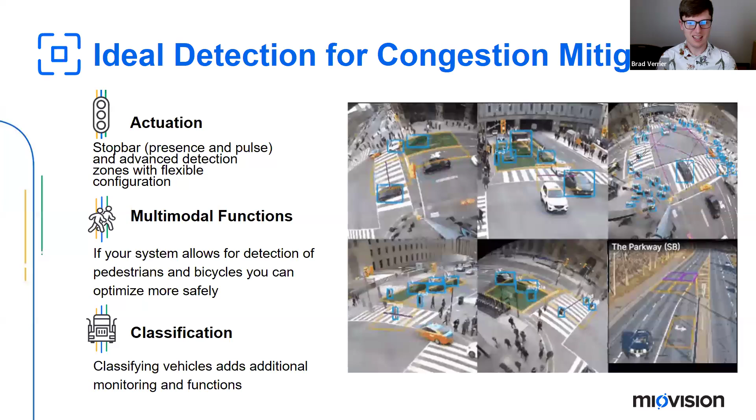On our next slide, we're going to be talking about priority control. Priority control is a bit of a blanket term, used for what's often called EVP and TSP, which is emergency vehicle preemption and fleet and transit signal priority.

There are a couple different types of priority calls that are very dependent on who's using it. For example, if a public safety professional is using the intersection, say an ambulance, we want to give it a green phase as quickly as is safe. That's with regard to if there's a pedestrian currently in the crosswalk, making sure we have our pedestrian clearance and vehicle clearance times set up correctly. We're preempting in advance so that as soon as they get to the intersection, they can get through as soon as they can.

Conversely, when we're working with things like transit, fleet, snowplows, and other systems, it's a little less important that they get the green light right away. It's more about leveraging them alongside detection so that vehicles with more importance, whether that's freight that needs to be on time or transit making sure bus routes run smoothly, can be tracked to figure out if a priority call should be made to either extend the green phase to allow them time to clear, or end the previous phase early so they can get a green light as soon as possible within the context of overall traffic operation.

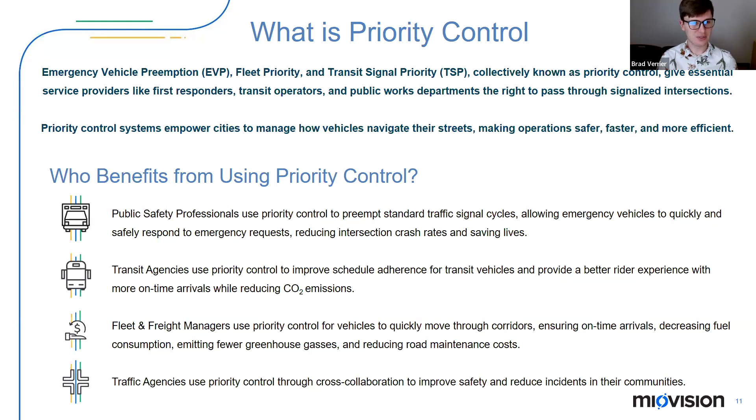The first is IR. Opticom was, we believe, the earliest in the space when it comes to preemption, and for almost 50 years IR was the only way to go. We did that through IR emitters on the vehicles, connected into the I/O wiring harness, making a customized flashing signal which would be collected by IR detectors at the intersection facing each approach using priority control. We communicate that down into the controller through a dedicated piece of hardware.

We then moved on to radio, where we took essentially a very similar solution from the vehicle side, except instead of using an IR emitter, we're now using radio, much less line-of-sight based, and we only need one detector on the intersection side, so it's a lot easier to maintain. Very similar on the intersection side in how that radio communicates into the traffic controller. This did solve a lot of the issues with IR, but there was still a lot of room for growth.

Most preemption systems today leverage a cloud model. The cloud model generally either uses direct CAD AVL data, or we can leverage GTFS or different freight data feeds, as well as modems in the vehicles which are transmitting the current status of the vehicle as well as its exact location. Then from the intersection side, you can either leverage hardware to communicate to the controller, or many systems, including Miovision's and others, are able to leverage a direct connection to the controller without any need for intersection components.

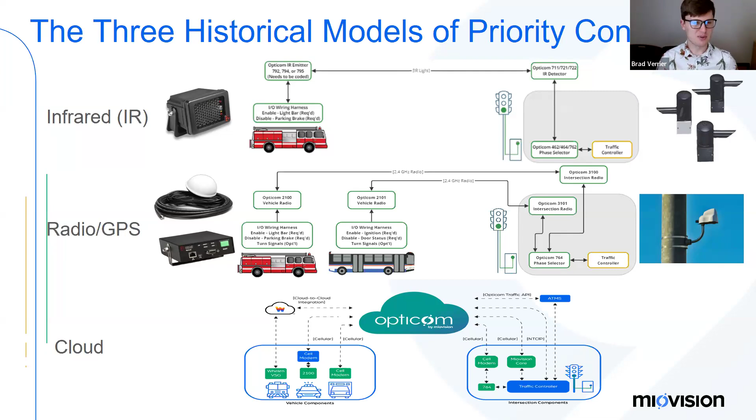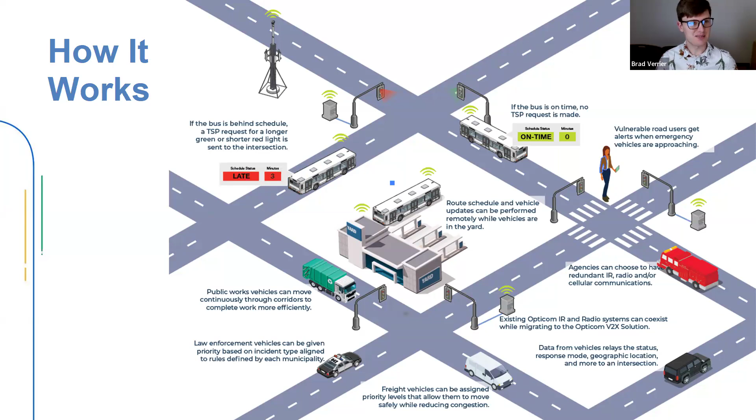Next, I want to talk briefly about adaptive control. It's not the topic of today's discussion, but I wanted to give you a quick understanding of how adaptive control also allows you to account for the vehicles using your road. Adaptive systems function based on understanding the current input at the intersection and then accounting for what operations need to be made to expedite those vehicles. In Miovision's case, we're leveraging the same hardware that the preemption and detection systems use, but there are lots of different ways to do adaptive control, whether through a hardware implementation or directly through a controller.

These allow you to accommodate not just public service vehicles, but standard cars as well. One of the big advantages of adaptive control, if set up correctly, is that you can leverage things like transit signal priority inside the context of adaptive control, so we're accounting for transit not in a vacuum of 'there's a bus coming, it needs a green light.' But if I notice there are 30 vehicles trying to head east and one bus trying to head north, I'm going to give priority to those 30 vehicles, because it allows us to weigh those buses inside the context of overall traffic.

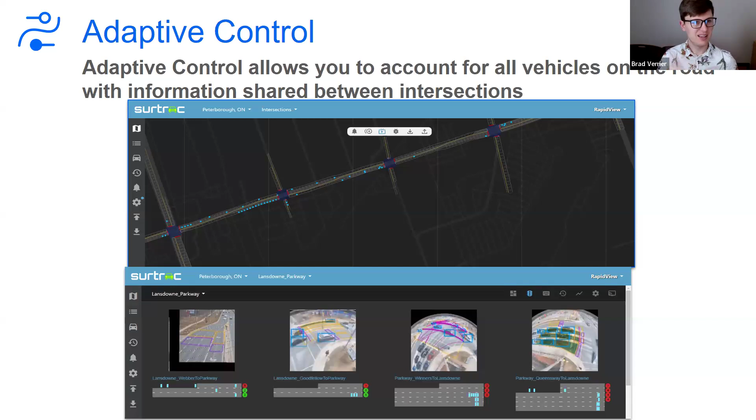Now we're going to move on to the second half of the presentation, around tracking continuous movement. I wanted to cover a couple of different things around how the intersection is operating, and the effects that everything we went over in the previous section has had on how the system is operating. We're going to be covering signal uptime, intersection utilization, reducing collisions, transit and freight effectiveness and consequence, ATSPMs, and the value before and after analysis.

Starting off with signal uptime, this is really about tracking anything that could be going wrong across your network. Whether that's an intersection in flash, a lack of detection information coming up, power outages, detection failures, or any issues with cabinet-level technologies, you're able to monitor those and get alerts for anything that's going wrong.

Then you're able to get certain notifications and alerts for all of the problems I've gone over. You can either review all of those alerts inside the platform, or you're able to get notifications. It's very important that if your intersection is in flash, you've lost power, or there's some other major issue, there's some way for you to be aware of it so you can jump on those problems and solve them as quickly as you can. Because when it comes to a dramatic failure at an intersection, that's the highest impact on congestion, so you want to get out there as quickly as you can.

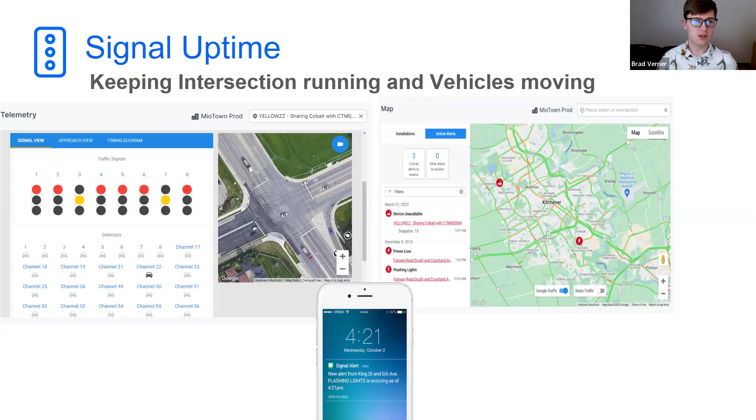A lot of companies, including Miovision, also offer temporary studies where you can track count data at an intersection over the course of about two weeks. But using a permanent solution is an easier way to make sure you're consistently tracking the utilization of your intersection. That's going to come more into play once we talk about before and after, closer to the end of the presentation.

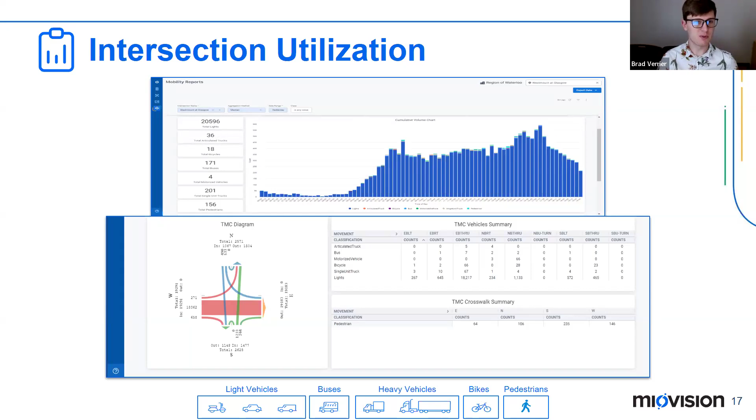Reducing collisions is a great way to minimize congestion at an intersection. Crashes can be a major source of congestion, so making sure to reduce those collisions before they occur is a really great way to avoid those pitfalls.

By tracking near misses, the number of times two objects almost collided, and tracking the severity of those near misses so you understand how close that was to being a fatal accident, you can take preemptive measures to improve safety before collisions occur. Since you can collect that data on a regular basis, it's a lot more reliable than crash data, which often misses details and is spread out. Using a system that tracks near misses gives you a full picture of what's happening at your intersection so you can make direct interventions to reduce this potential barrier.

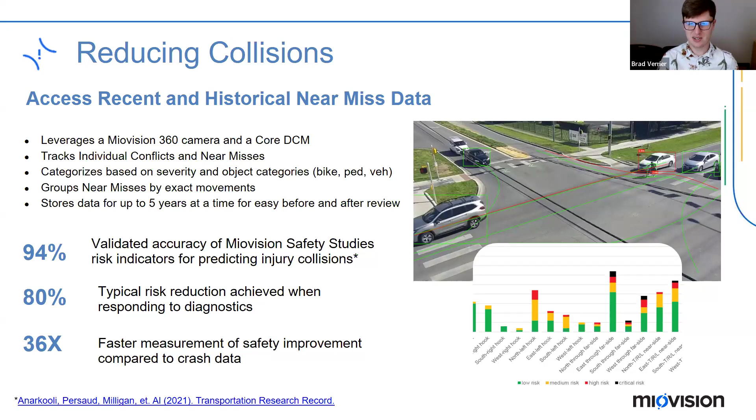Next we have conflict clips. This is a demonstration of how Miovision's near miss detection works. You can see it's tracking the two objects that almost collided, their relative proximity, and the relative speed of the inciting vehicle to give you an idea of how close that was to an accident. I find the one on the right very revealing because it shows one vehicle was completely unable to see that pedestrian until they almost hit them. So perhaps this is a case where we need a dedicated left turn if this intersection is busy, to make sure that's a protected movement and reduce the number of collisions with pedestrians.

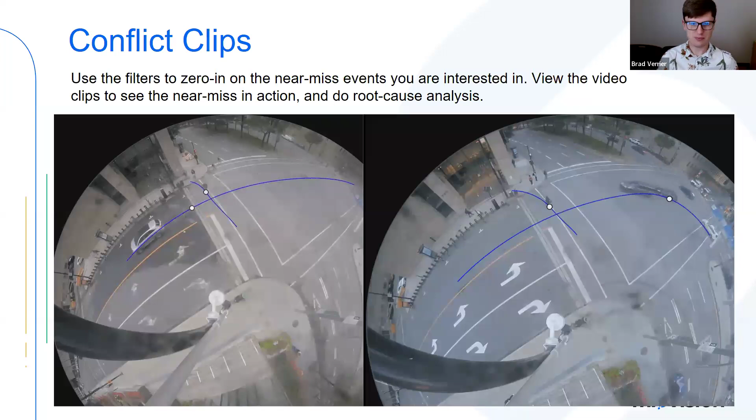We're also able to measure the effectiveness of some of the other systems we went over. In the case of transit and freight effectiveness, it's a bit more direct. We can tell you things like how long the vehicle was stopped along the route, how long it takes between stops, total travel time, and time spent stopped at signalized intersections. This is a great way from the transit and freight side to understand how congested that route is. You can talk to traffic engineers about improving the operation of the intersection as a whole, or investigate giving more allowance to your TSP green times.

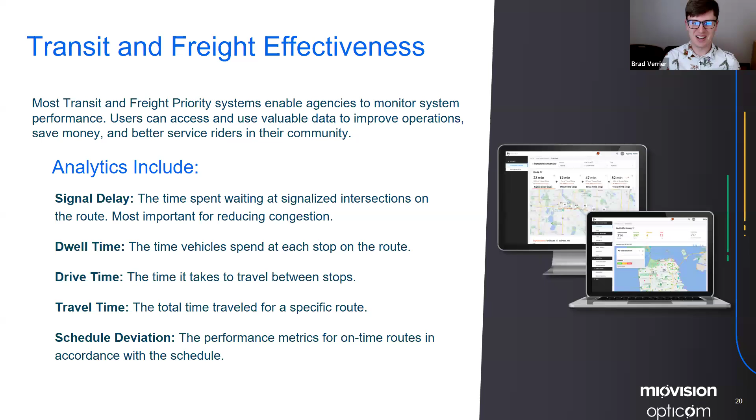We carry on, we're just about done here. Next slide, here we go.

The last thing I wanted to talk about are ATSPMs, using data over time to measure the impact of these systems. You can use simple data points or data over time to understand not just how your intersection is doing, but how changes you're making, whether implementing freight control, TSP, or some other system, have impacted the intersection as a whole. We want to make sure we're reducing congestion overall, not just for certain individuals. Leveraging ATSPMs to understand the impact on overall traffic is a really important part of that discussion.

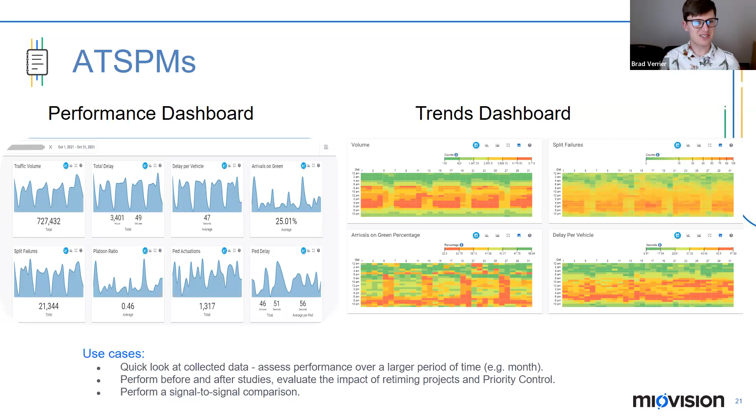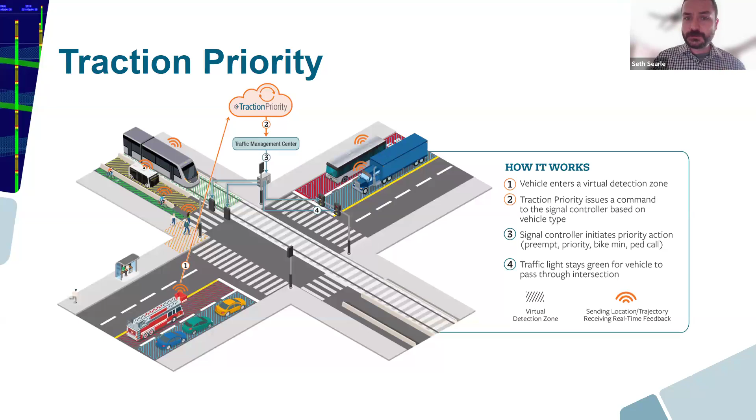That's ingredient one. Ingredient two is the connection to the traffic signal controller. As long as there is some type of communication to the controller, we can typically use NTCIP messaging, but there are legacy controllers we support too that use old protocols like QuickCom and AB3418. As long as there's communication and a protocol the controller supports, and it supports some type of preempt or TSP remote commands, that's really all that's needed to make the system work. The graphic speaks to the rest.

Just some brief characteristics here - sorry if you're struggling there, Alric. I'm not sure if there's some advanced timers going on these slides, I see that happen sometimes. Yeah, I believe it is. If you need to take a minute to take those timers off, but I'll keep going. Let me know if you need me to pause - I've had that happen many times in my presentations.

Some quick characteristics about Traction Priority: it's fully cloud-based. The graphic you saw before - the quick way to summarize this is it's fully deployed in the cloud, with no equipment in the cabinet or in the field. The only consideration that needs to be made, true of any smart city or IoT solution, is you typically need some edge processing. While we can poll signals straight from the cloud, modern security standards and agency IT departments typically prefer that's done on the agency network. I bring that up as a disclaimer - while this is cloud hosted, practical considerations usually require us to do that polling and connection to the signal controllers on the agency network to comply with firewall rules. But all other processing is done in the cloud.

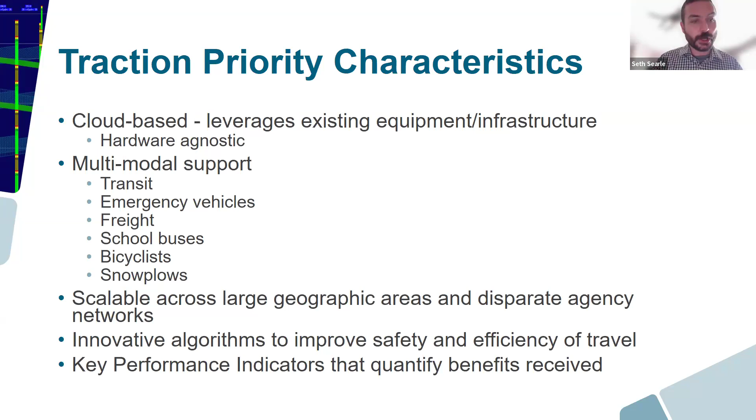Another characteristic is scalability - something great about cloud-based solutions. It can scale endlessly; we have the capability to continue leveraging more resources as you get 2,000 vehicles, 5,000, 10,000, and beyond. This also allows the connection of different agencies together. In one example, we've implemented freight priority in North Central Texas, providing priority to up to 10 different agencies in one solution - something historically difficult across disparate networks, but made a lot easier through these modern cloud platforms. I'm going to skim over the algorithms, but there are a lot of innovative algorithms used in the cloud to facilitate transit signal priority - business rules and adaptive control are some good examples.

And then finally, the key performance indicators.

Alric, let me pause here real quick - do you want to turn those timings off? I can show you where they are if you want to quickly turn those off so we're not constantly battling this. Please do - yeah, just hit escape real quick, and if you're in PowerPoint, there should be a timings view under the slideshow tab, I believe.

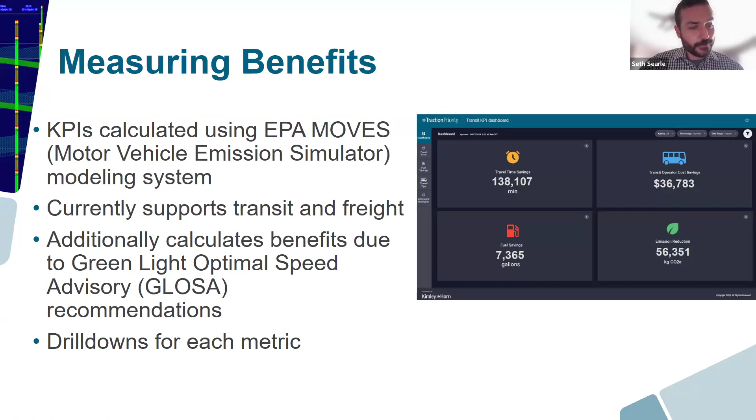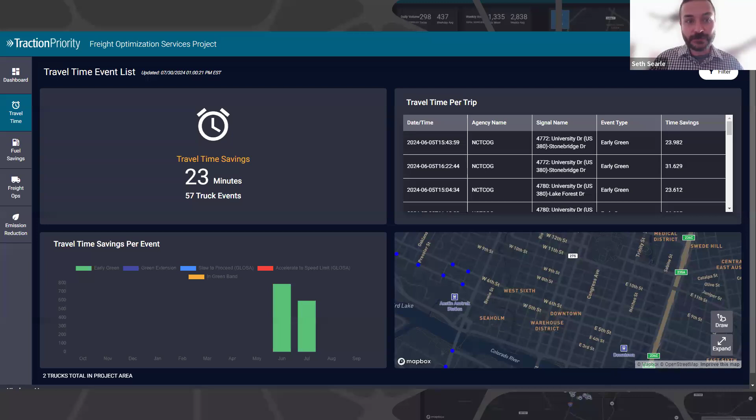And then if we advance, we'll go pretty quickly. These are some of the drill downs that are available for each of these metrics. So travel, it all goes down to how much time, thus fuel, thus emissions, thus cost, was saved by the system operating effectively. So this is the breakdown of the travel time savings - what did you save in terms of minutes?

Next slide, we have fuel savings. So this is based on all that information, those calculations, how much fuel was saved. And I'll just briefly mention, as you look at these different panes, you can fully drill down. This is broken down into every single TSP action - you see 0.083 fuel savings. You have full visibility, full drill down into all of this on a per vehicle level, per fleet level.

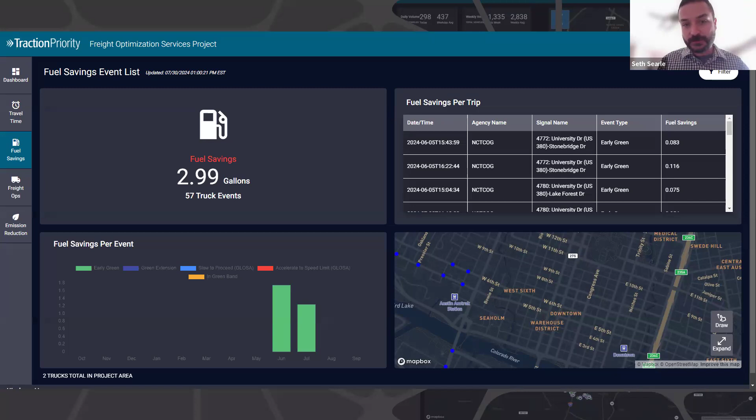With freight priority, there's a number of different fleets operating. So this will also support rolling that up, based on the filtering of the website, to see those benefits across the entire fleet.

Go ahead and go to the next slide. This is, again, just another view, the translation of fuel savings into cost savings.

This is something I think we anticipate getting a little more complex, so let me give one more quick example. We always focus on fuel savings, but something that was illuminated to me when we did emergency vehicle preemption is the wear and tear on brake pads, for instance, for a fire truck loaded with a full tank of water is massive. So when we're able to get them a green light and prevent them from stopping, it's not just fuel that's being saved, but also the wear and tear on brake pads and other components. The cost savings, while right now tied more directly to fuel, there's an unspoken benefit I haven't heard mentioned a lot, but it does seem to resonate with those who actually maintain these fleets - there's more than just fuel we can benefit from. That's something else we'll be aiming to capture.

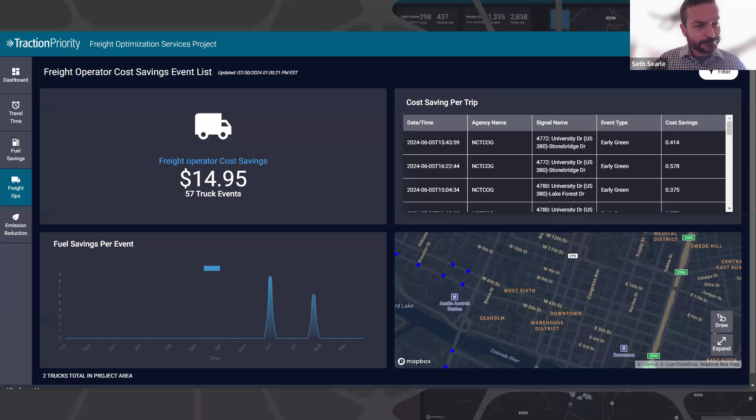Go ahead and go to the next slide. This is, again, just another visualization. This gets into the emission reduction - so of those fuel savings, the cost savings, what did that amount to in terms of emissions reduction?

All right, I think we have one more here. This is a separate display, hot off the presses - we're just wrapping up development on this now. In the vein of key performance indicators, and more specific to transit where there's a concept of a fixed route with predictable trips, we've developed a dedicated route status display that allows you, as the TSP system is running, to go back and view every single bus trip, where different actions occurred, where slowdowns occurred, whether there was a green success versus an arrival on green - there's a distinction. You can hit a green light not due to TSP, or get a green light due to TSP. So it provides that granular breakdown.

And then a number of tile cards on the right show the key performance indicators, or maybe we call these transit signal performance measures - that's what I've been hearing these referred to more frequently. Those are calculated on the right-hand side based on the different selections for the display. This is just another example of what we, and I'm sure many others in our space, are trying to do - take this awesome technology and show you here's everything it's doing, here are the benefits it's providing, because those are the big questions I think we all need answered.

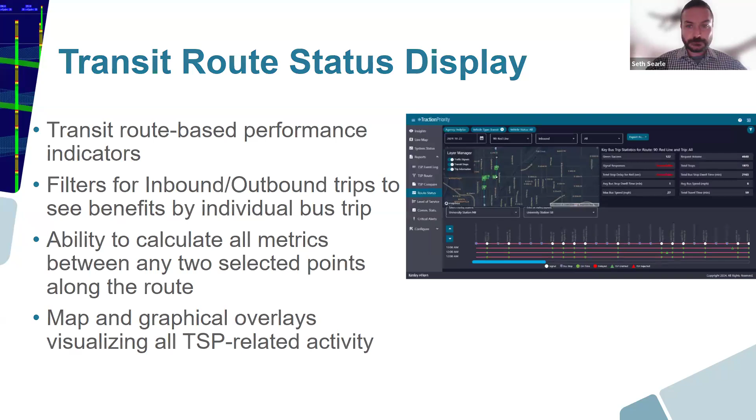And yeah, just a quick zoom in so you can see in a little more detail there. That's good - just wanted to flash that real quick so you could see the zoom in.

All right, I'm going to wrap up with these last couple of slides here. Just wanted to provide a couple of project examples. The intent with this section is what's happening out in the real world - what is actually possible beyond the standard stuff we all come to know and expect about TSP. So just a couple of case studies here.

Austin, Texas - this is one I wanted to focus on. In this deployment, we actually implemented traction priority citywide to provide both transit signal priority and emergency vehicle preemption in one solution. I want to give a shout out to Brad - I think he did a good job explaining earlier a lot of the behind the scenes, how this is possible and how a lot of this equipment can be used to do the same thing. He's spot on - that's exactly what we're doing here in Austin, Texas, obviously with that more cloud-based approach.

I think another notable piece here is this was an early litmus test for our solution specifically on just how well those scalability claims hold up. I mean, we all believe and we know you can scale endlessly in the cloud, but there are sometimes other factors that make that not so straightforward. So this was a great litmus test and did validate and prove that this system can work just as well with 2,000 vehicles as it can with 50. Just wanted to note those two points there. Move on to the next.

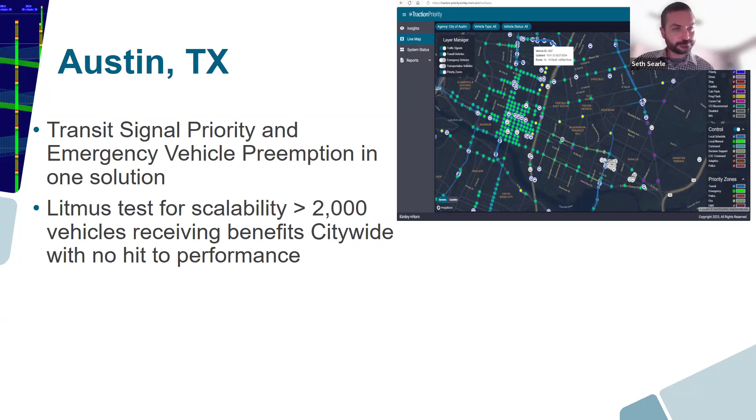Los Angeles, California, we're implementing transit signal priority for LA Metro on over 1,600 signals. What I wanted to highlight about this is the ability to still do TSP with a non-traditional type of deployment and a non-traditional type of controller.

In California, they have their own firmware. There's an LA DOT firmware that runs in the LA area. There's LACO 4E that also runs in Los Angeles. There's Caltrans TSCP. None of these firmwares support NTCIP. They support old versions of AB 3418, and in some cases their own custom protocols.

So this was an especially unique one because there was no polling to the signal controller. The status is coming back to us through a SPAT feed. So all of the actions from the controller, we actually receive secondhand from a SPAT feed that's running twice per second. So we are getting the data very quickly, in some cases even faster than when we poll controllers directly.

And there is a secondary COM port in these controllers exclusively for handling TSP requests. Instead of communicating to the controller, we're communicating to what's called a TSP emulator that LADOT staff has written and provided to us.

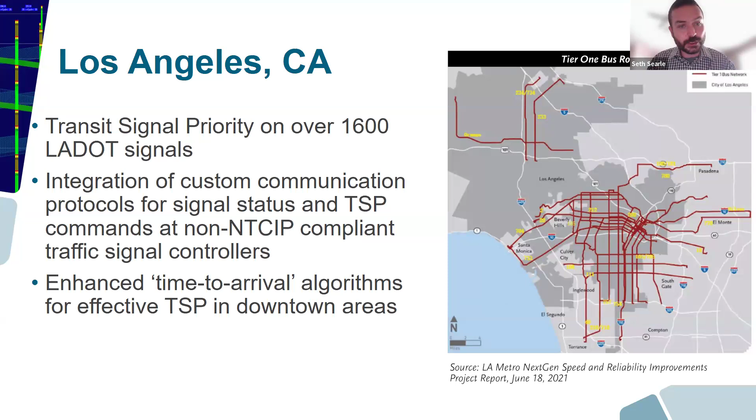So I bring all of this up just to say, even if you have non-traditional controllers and a setup that isn't as conducive, there are a lot of things you can do around the seams to still make a cloud-based solution work. And then just another factor here, there's a lot of closely spaced signals. There's a lot of talk about what's the best strategy to take when you have very closely spaced signals in a downtown area. We've implemented some really clever time-to-arrival algorithms that go down multiple signals to get those TSP requests propagated ahead of time.

I think I have just two more quick slides. IndyGo, this is the Indianapolis transit group. In this project, we implemented more selective traction priority on 2 of their BRT lines.

I wanted to note this: one of the unique aspects to this project was the integration of real-time feedback via the Traction Connect mobile app. Traction Connect is our connected vehicle solution. We are using the mobile app that can basically be used as a mobile BSM and shows that type of GLOSA display. It shows the real-time signal status to a user through the mobile app as they approach the signal, the same kind of philosophy as map and SPAT data.

That app has actually been hooked into our TSP deployment and is relaying to bus drivers whether or not they received a TSP grant in real time. So this was kind of a first of its kind. Instead of looking back after the fact, let's actually show this as it's happening to the person driving the vehicle, what the signal is. I thought that was a really cool thing that we were able to implement in this project.

And then this was a good example of some of what you can do with certain controllers. The Econolite controller, the EOS specifically, has varying levels of priority that can be assigned to any vehicle type. So you can effectively give something like preemption to a bus, or you can dial it much further down. There was some unique aggressive priority that the stakeholders wanted to implement here that's a little more aggressive than we've seen elsewhere. I wanted to highlight that as a unique Econolite feature, and a good example of what you can do with certain firmware that you may not be able to do with others.

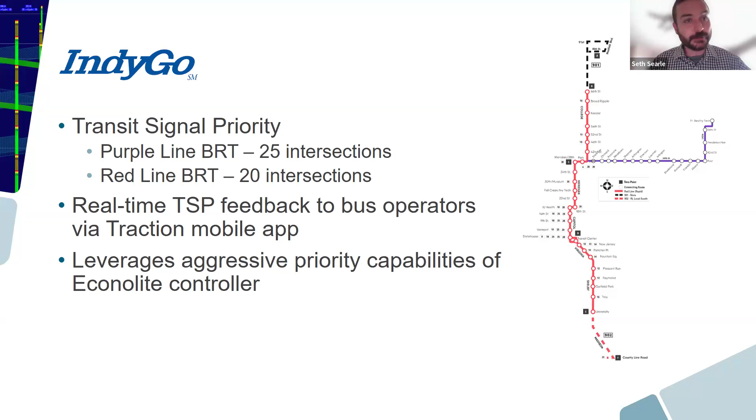And then I mentioned briefly, I talked a little bit about mobile apps. We have a dedicated mobile app that can be used for testing at any point. It has a dispatch simulation feature, and this allows for testing of the solution from any vehicle without having to install any equipment. And that's it, that's everything for me.

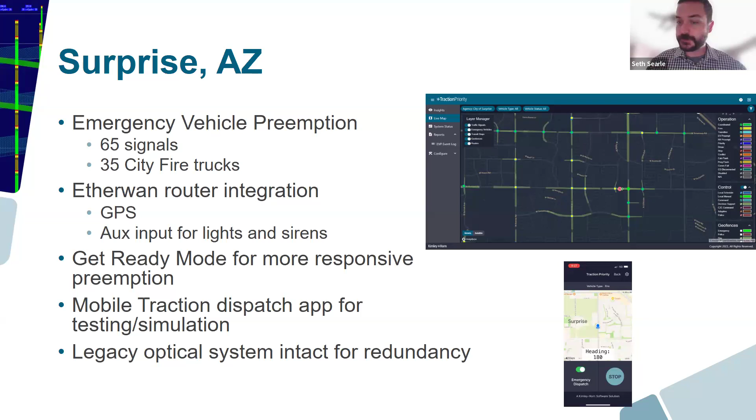A little too quick on the draw. Appreciate your presentation, Seth. Thank you.

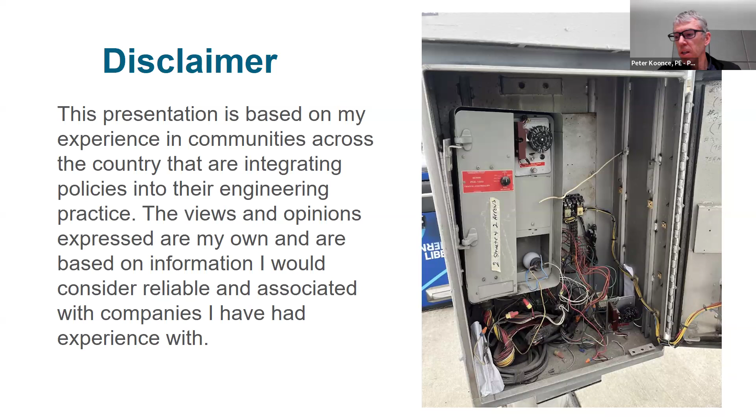Next slide. So trying to kind of think about the history here, in 2000, gosh, I feel like I'm dating myself now, we implemented signal priority. We did it in conjunction with transit and emergency. I'll talk about the technology in a second. But this again, before the cloud, before some of these new things that you've seen from the previous two presenters, we introduced freight signal priority measured based on the length of vehicle at an intersection, and said, yeah, we can make some modifications to that.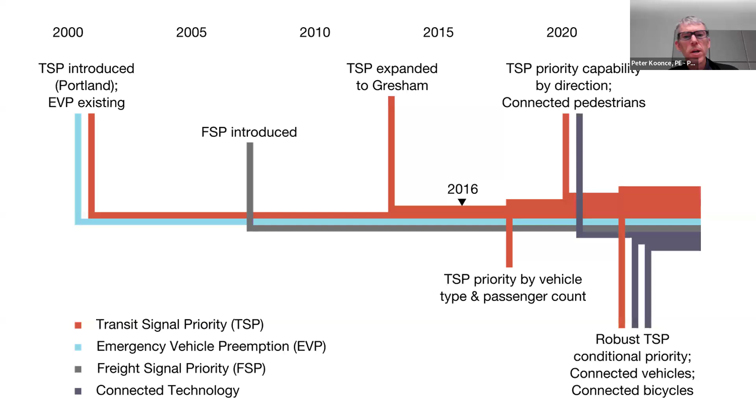We've done some expansion. We're thinking ahead to connected vehicles, bicycles. Really interesting to see Brad and Seth talk about this. I'll just give you the perspective from an agency that you may be dealing with, maybe a small agency. So let's flip to the next slide.

This notion of, when we think about this, I guess I'll just maybe give you, if I'm looking at Seth's presentation, the idea of trying to implement and go backwards in technology, to me, is a little bit of a rough sell. I think that, and I'll give you some rough costs on this, most of our traffic engineers should be working towards connecting to the internet. I think that's kind of part of the smart city. Connecting through to the cloud is a bit of a stretch for some of our agencies. So just kind of know that. The presentations you've seen are kind of the next level sort of ideas, and most of our agencies are not quite there yet. So I'll just put that as a word of caution that your technology and your local agency may vary.

Next slide. So I said Ithaca, New York, small agency, 30,000 people, but went in on a smart grant and said, gosh, can we do signal priority? So I'll just talk about the who, what, when, and why. The who and the what is really, we looked at the small city, and actually it was both city and state Department of Transportation there. We said, gosh, you have to start with communication and traffic signals, communication and controller upgrades. But then, who would we provide priority for? And so from a fleet operator standpoint, it's kind of a who is ready from a technology standpoint.

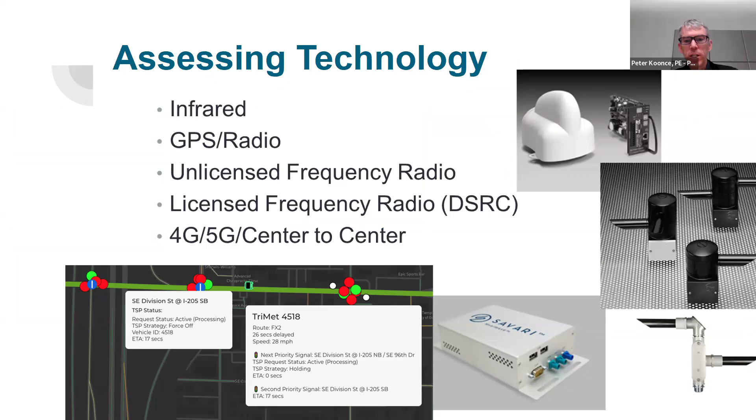Public transit could be one, fire trucks, freight providers. I could think about Amazon. I've worked with Google—should we be thinking about Google buses and Google cars in the future? The opportunities are really endless. But you've got to do a lay of the land and assess your technology. Are you ready for cloud-based, or is there something more rudimentary from 20 years ago that we'd want to use?

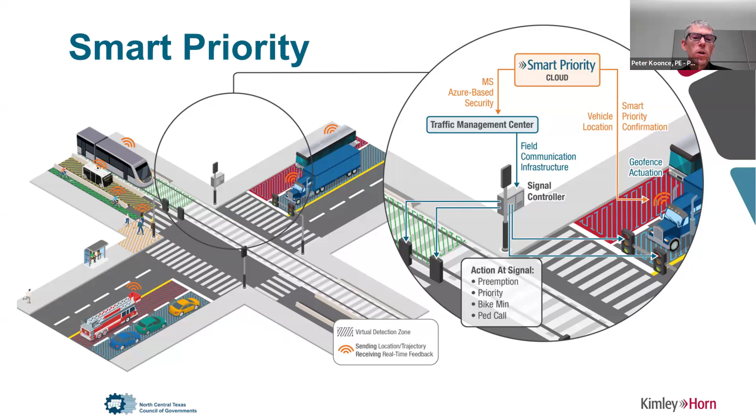I borrow this slide from Kimley Horn because I love it—it incorporates all the various partners here: rail, buses, freight, autonomous vehicles in the future, pedestrians, you name it. I think we can consider where we go with the technology that's at our fingertips.

But it's not just at our fingertips. We really have to dig into where we're at related to technology on the vehicle side, and there are a lot of different AVL vendors out there. Sometimes we have to upgrade those.

Sometimes we can think cellular. Can we use those technologies? Are they ready? Can we tap into those various devices? Or do we have to think more broadly—and are the people ready for it?

So the various agencies—who would do this work? In this case, the city of Ithaca selected a contractor that led the project. We're still working on the contracting details, but all these various folks had different questions. New York State DOT had different investments they wanted to make, and Ithaca IT had cybersecurity questions. There was a whole host of key challenges we went through that I could go on and on about.

In the interest of time, I'll boil it down: if you're going into a cloud-based realm from a fleet vehicle perspective and asking the traffic signal agency to accept a message from outside their normal operations, there are going to be cybersecurity concerns. In Ithaca, they selected a contractor that included Miovision as the technology, and the fascinating thing was the state DOT had already been using that technology.

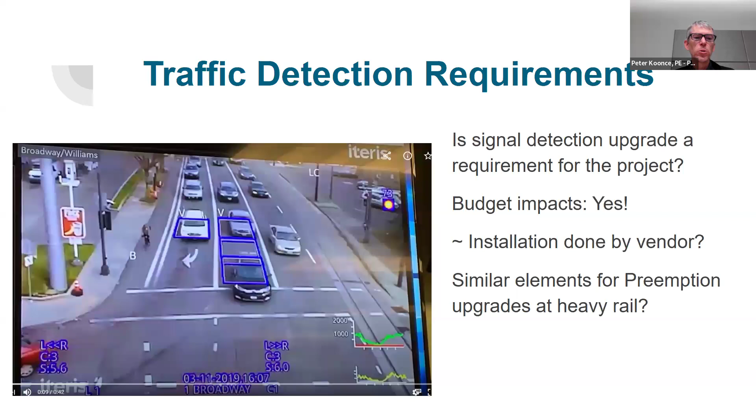I loved Seth's comment on brake wear and tear. As a city, I like to think about the wear and tear on pavement conditions too - heavy vehicles hitting the stop bar, or heavy vehicles starting from an uphill approach. These are things I think we haven't completely quantified, and I'll just say I think we're leaving a lot of money on the table - not only fuel cost savings, but also benefits for our community.

It requires significant coordination - you'll hear that from Owen as well. And then this notion of how we pay for it and how we have continuous feedback from our signal systems - that's the thing that keeps me excited about the future as we contemplate additional technology on our streets.

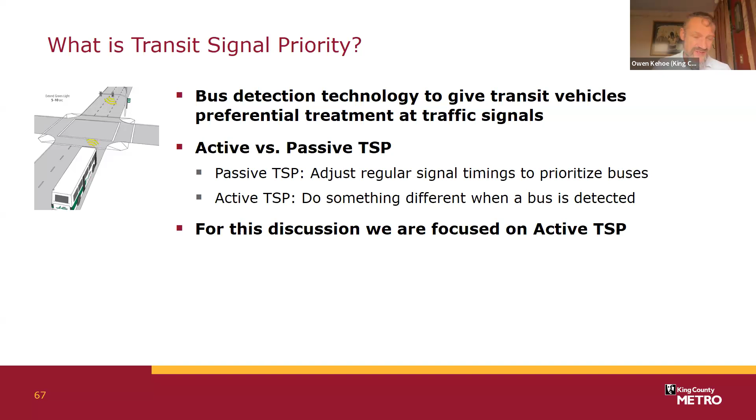You might hear sometimes about active versus passive TSP. Passive TSP is the concept where you just adjust the signal timing assuming there's buses there, and you don't do anything special when the bus is there. What we're talking about is active TSP, where you detect a bus and the signal controller does something different.

Our legacy TSP system was originally deployed as part of our Rapid Ride BRT program, the Rapid Ride A through F line, starting around 2010. When we deployed that, we did a lot of before and after studies of these lines.

This is what we found: if you're looking just at traffic signal delay, you can reduce that up to 14%, which is what we measured on the E-line corridor. If you're looking at end-to-end travel times, we're seeing savings around the 5% level. It's not huge, but it's a nice little bump in travel time.

More recently, on the Rapid Ride C and D line, we did a re-optimization project focused on improving reliability. In that case, we saw an improvement in buses meeting our headway target after doing that work.

This is where we currently have TSP - a little over 200 intersections, like I mentioned, our Rapid Ride A through F corridor, plus a few other high ridership corridors with TSP. This system is dependent on hardware implemented at the intersection, so it's very infrastructure heavy. It requires our own fiber optic network connecting all the intersections along these corridors, which we own and maintain.

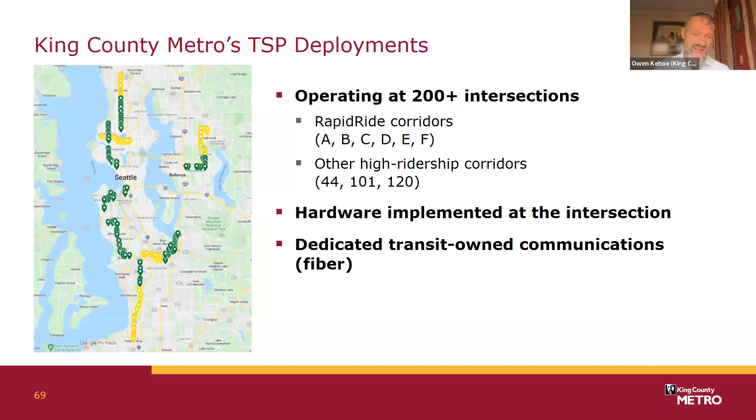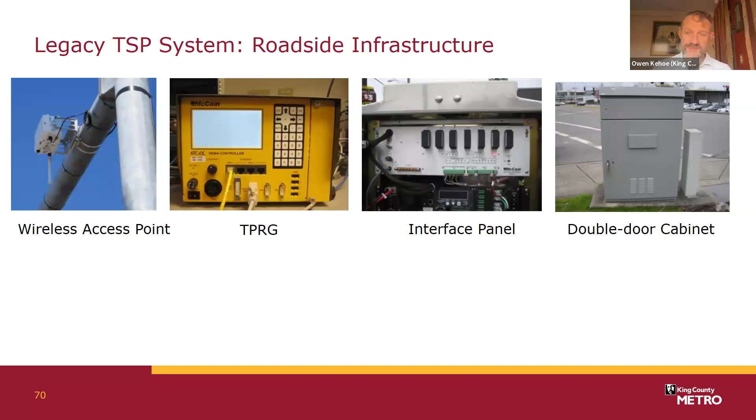So we want to move away from doing roadside infrastructure type TSP.

What we're moving into is what we call our next gen TSP system. The older system, besides being hard to maintain, has had intersections go offline - like a car hits the cabinet and then communications are down for the whole corridor. So we want to improve accuracy and reliability, but our main goal is to reduce the cost of deploying and maintaining the TSP system.

Also, cities have already built communication systems to the traffic signals, so we want to leverage that. Our buses have cellular communication, and we want to leverage these new communication systems too. So we're moving to a cloud-based system.

This is the architecture we've developed under Next Gen TSP. We currently have a fleet of about 1,500 coaches, and we did not want to add any hardware onto those coaches because that would be a big expense. We already have our CAD AVL system run by a company called Init, so we had Init modify their software to create a dedicated feed just for TSP. Every bus in service pings its location once a second, and it sends it to this TSP data server managed in-house by King County Metro.

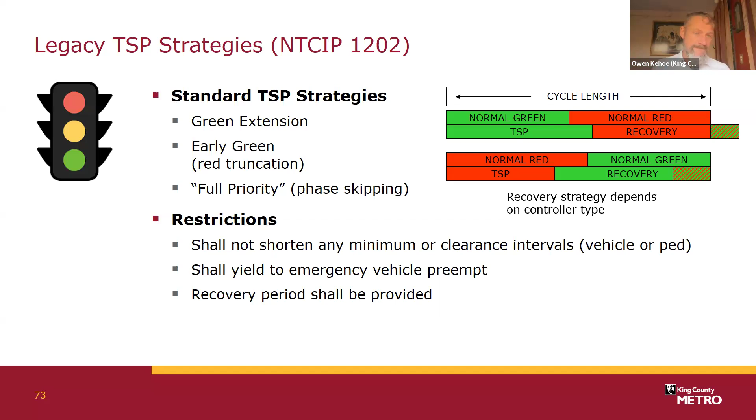The newer types of strategies, what we consider the next-gen strategies, are covered by the NTCIP 1211 standard. The big difference is rather than requesting priority now—here's the bus, do something—the 1211 standard allows for an ETA message. As the bus is coming, even up to about 2 minutes in advance, you can start sending these messages, and the traffic signal controller can start doing more subtle adjustments to anticipate the bus arrival, ideally having the signal be green as the bus arrives at that ETA time.

If done right, this can have a lot less impact on other intersection users. You maybe don't need to do phase skipping or shorten the phases quite a bit if you have this ETA information well in advance.

This can also handle near-side stops. If you have a bus stop before the intersection, the system can learn over time how much time the bus typically takes to reach the stop, and use that to choose an intelligent ETA. This is something where transit maybe has a leg up on emergency vehicles, because buses run the same route hundreds of trips a day, so we build up pretty rich historical data of how long the bus takes to reach a particular intersection.

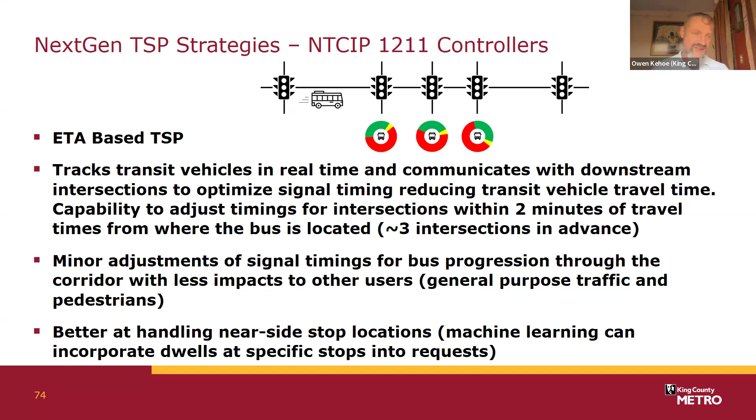Besides those strategies, some stuff we've been thinking about for the future: we're looking at potentially integrating TSP with active service management, or ASM. That's basically where, rather than buses running to a schedule, you have a dispatcher actively trying to keep the headways at a constant spacing.

We could potentially use TSP to assist that. So if the buses start to have a big gap in service, you could start giving extra priority to that bus to help it catch up.

We've looked at doing some enhanced pedestrian signal timings. As the bus approaches an intersection, there are people that want to cross and get on that bus, so you could potentially activate a ped phase before that happens. I think the City of Portland actually does this on the Division Street BRT corridor. And after the bus drops off people, they're going to want to cross the street, so you could activate another pedestrian phase there.

We're also looking at using the TSP system as better detection for special bus-only signals and queue jumps. Currently we just use standard loops or video detection, but with TSP you could maybe provide more advanced detection.